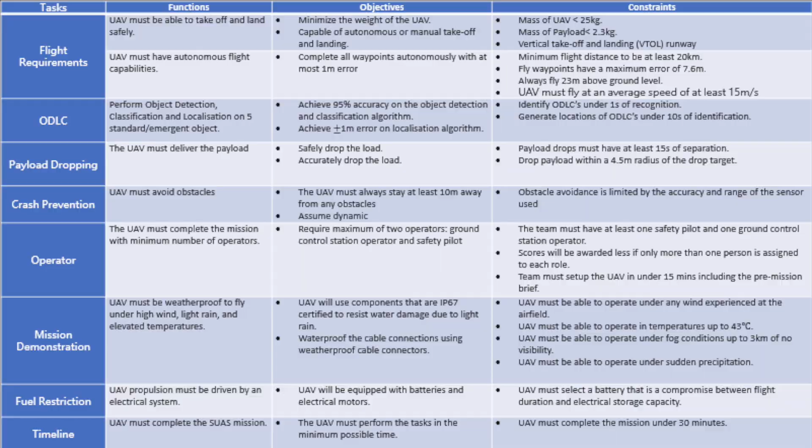Welcome to the technical design section. This section will give technical details on 10 aspects of our design. For our acceptance criteria, we devised a functions, objectives and constraints table to be used as a guideline to meet the competition requirements. For example, we constrained ourselves to be able to fly at a minimum speed of 15 meters per second, which would allow us to complete the mission within a maximum limit of 30 minutes.

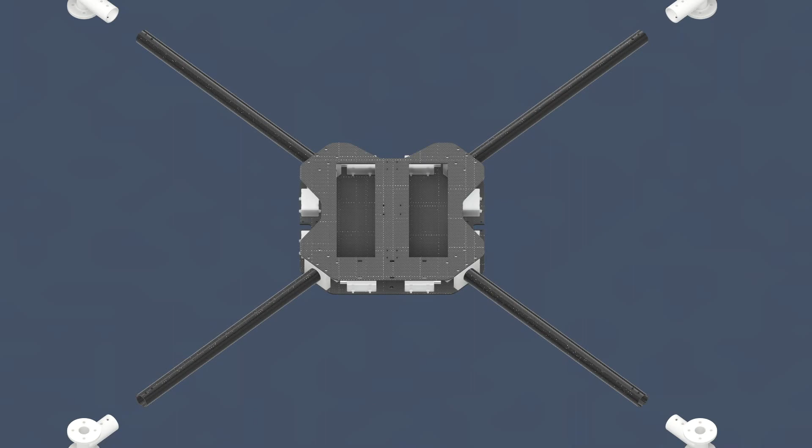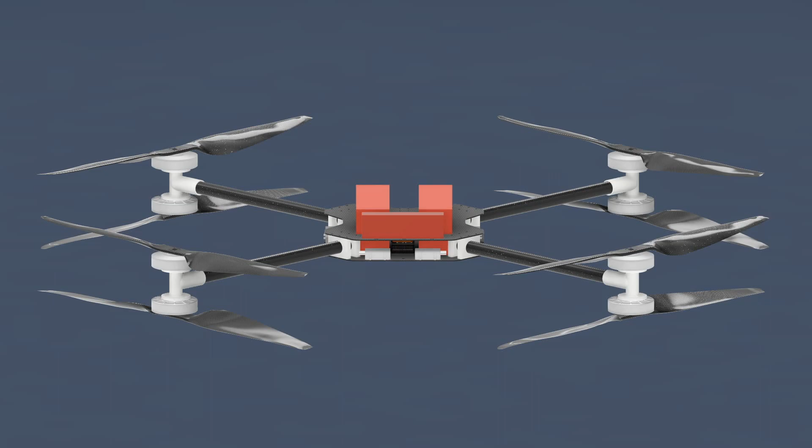A breakdown of our UAV design is shown here. The center of the body houses the Cube Orange and Herelink, which are used to control both manual and autonomous flight. 8 ESCs are housed on the same plate, which transmit power to each of our 8 motors. Our X8 coaxial design uses two 27 amp-hour batteries to power the motors, which are housed on custom-built arms. A smaller 6.5 amp-hour battery is used to power the auxiliary electronics, such as our LiDAR and GPS.

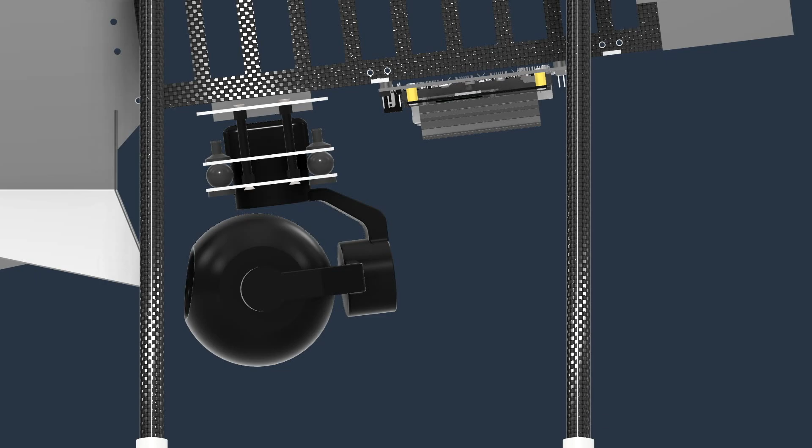On the underside of the drone, we've mounted our payload delivery system, which uses a winch to safely and accurately lower bottles to the target. Underneath this, we've mounted a Jetson computer and variable zoom camera, which are required for object detection, classification, and localization.

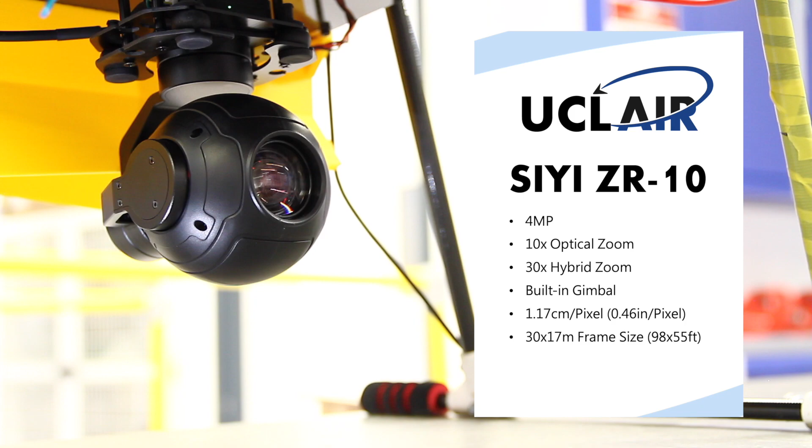The camera of choice is the SIYI ZR10 gimbal camera, a 4 megapixel gimbal camera capable of 10 times optical zoom or 30 times hybrid zoom. The inbuilt gimbal ensures the camera will always look down, regardless of the drone's orientation. The ground sampling distance of the camera from a height of 23 meters was 1.17 centimeters per pixel, with each frame covering 30 meters by 17 meters on the ground.

The localization of the airdrop targets was calculated by using a single camera and a GPS module. The longitude and latitude of the targets were determined by calculating the target's location in pixels from the center of the image, and then by using the focal length of our camera, we were able to convert that distance into meters and then into GPS coordinates.

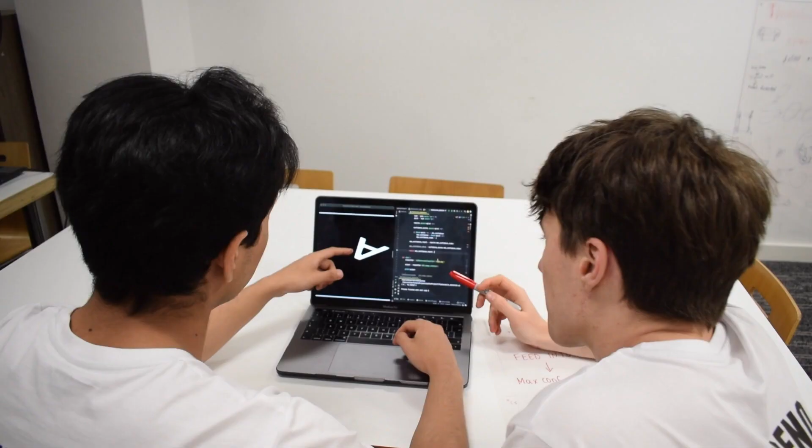The main algorithm used for color detection is k-means clustering. The largest contour is extracted and pasted onto a pink background. This was done as pink is not a color listed in the regulations and is therefore ignored during the k-means clustering, to ensure the background has no influence on the result. The algorithm maps each RGB code of the cluster center to a color dictionary and outputs 2 colors, for the shape and for the alphanumeric.

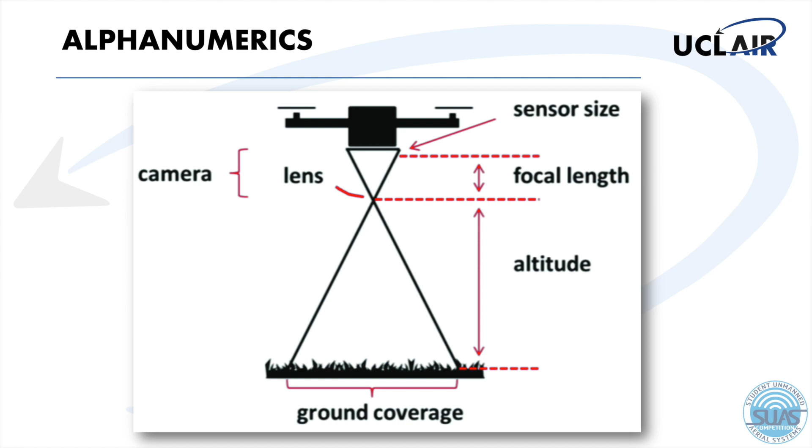The shape of the targets are classified using YOLO v8, trained on a synthetic dataset of 10,000 images over 50 epochs and using a batch size of 5. The size of the shapes in the dataset were approximated by using the focal length of the camera. The symbols recognized are then rotated 15 degrees each time before being fed into OCR Tesseract for alphanumeric classification.

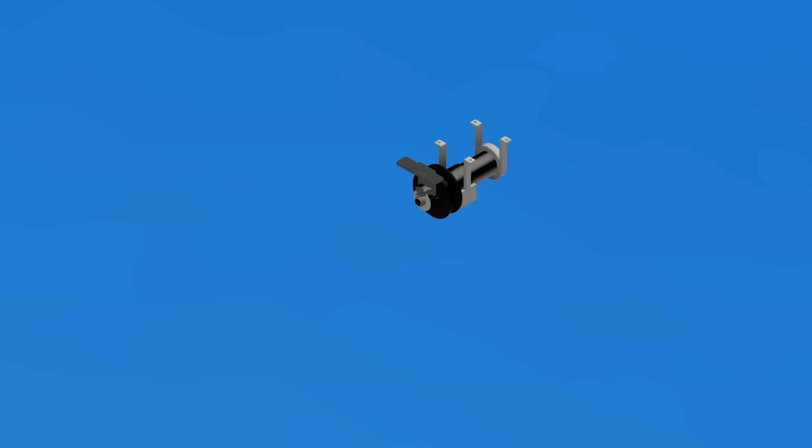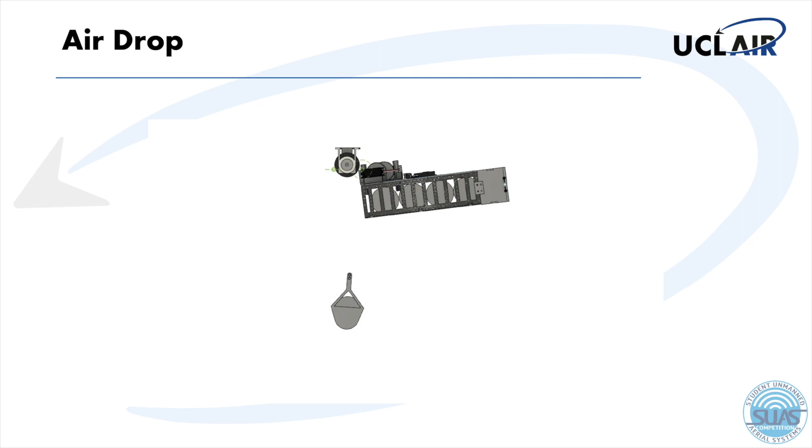For the airdrop task, our team has built a proprietary airdrop mechanism. This uses a DC motor winch that controls a bottle carrier containing 1 bottle. The remaining 4 bottles are stored on an inclined water bottle storage rack controlled by 2 servo doors. When the aircraft reaches the drop location, the bottle carrier is lowered to the ground by the winch via a fishing line and topples once it hits the ground, causing the water bottle to be deposited on the target.

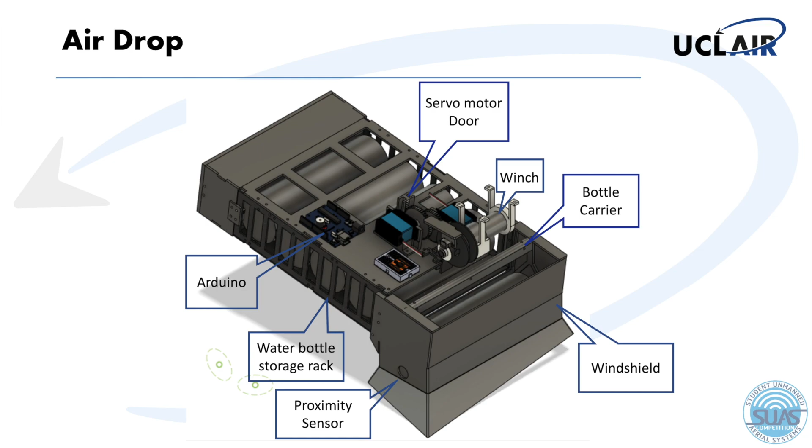The winch will then bring the carrier back up to its initial position, and the servo doors will actuate to allow 1 more water bottle to be loaded into the carrier. The process is then repeated at the next airdrop coordinate. The system is controlled by an Arduino Uno, and an encoder is installed to monitor the drop progress and control the time taken for each drop. In addition, a capacitive proximity sensor is used for redundancy to ensure that the carrier is in the correct location before the next bottle is released.

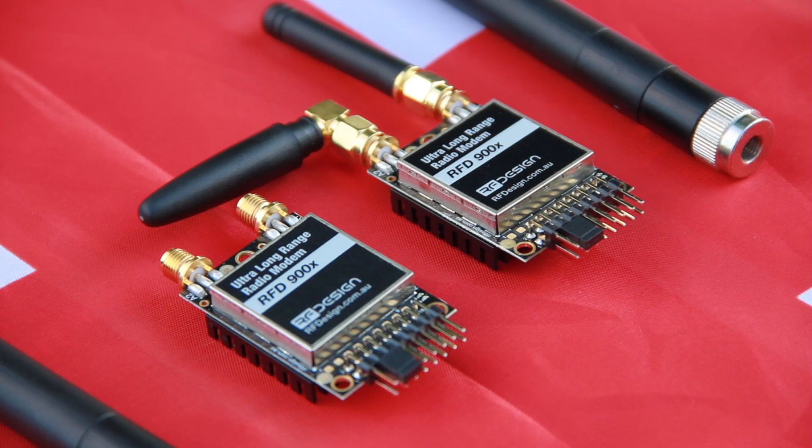For air-ground communications, two telemetry and radio units are utilized. The first of these equipment are the RFD900 radios. RFD900s are high-performance 900 MHz radio modems that facilitate communication between the UAV and the ground control station from distances of up to 40 kilometers. Data transfer is achieved using Mavlink, a lightweight messaging protocol. The throughput of this protocol is well below the 500 kilobit per second air data rate of the radio. Additionally, the radio modems are capable of frequency hopping and signal encryption to ensure reliability and safety. The second communication unit uses the Herelink ecosystem, consisting of an air unit and a controller.

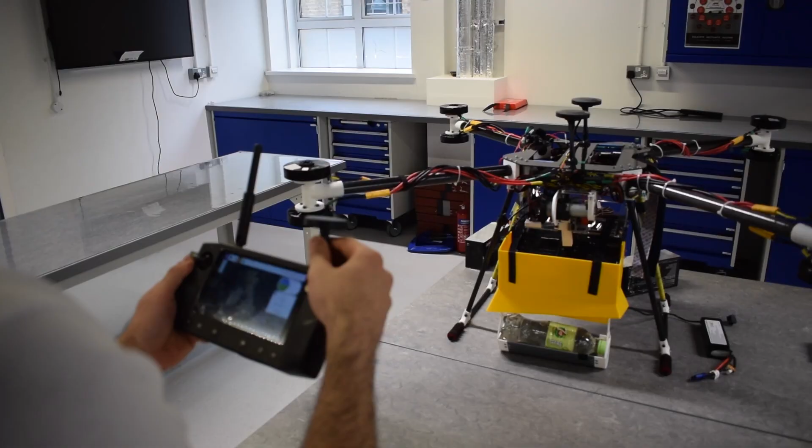The Herelink air unit has an RC receiver to allow manual flight using the controller. At the same time, the air unit communicates with the controller using Mavlink. Hence, the controller can act as a secondary ground control station. Herelink uses a 2.4 GHz frequency band and has a range of up to 20 kilometers. The combination of these two telemetry systems allows for reliable communication even if one of the systems fail.

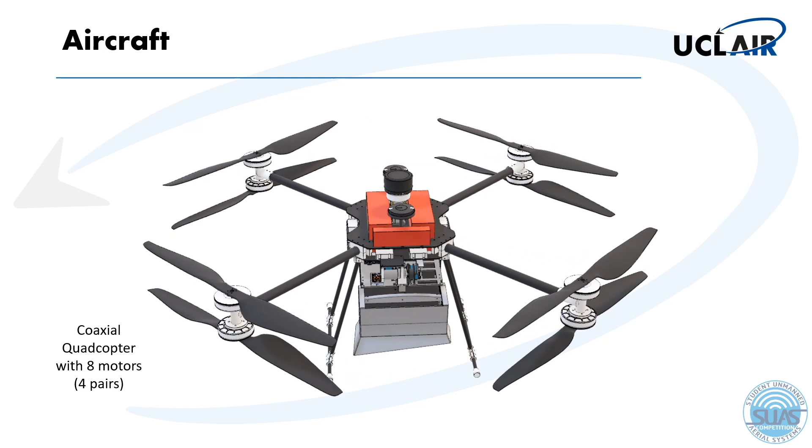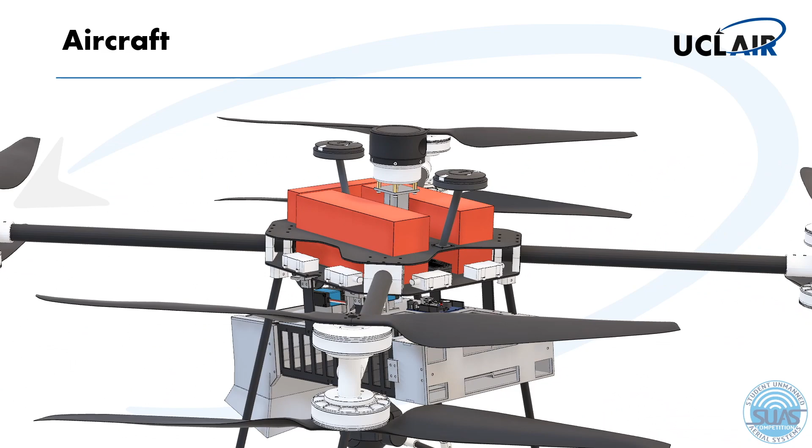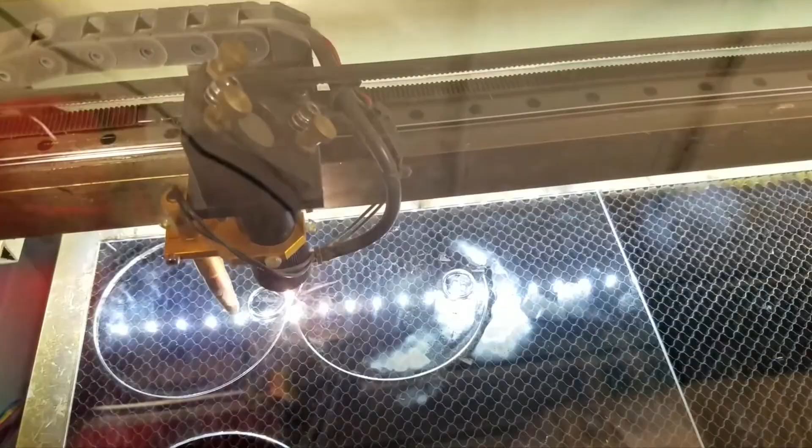The team would make a coaxial quadcopter which is driven by 8 motors, each providing a thrust of 6.7 kilos. These are powered by 2 lithium-ion batteries which give the UAV a flight time of 27 minutes at full speed. The chassis was designed around these components with compactness in mind to minimize aerodynamic resistance. The chassis was manufactured through 3 main processes: CNC milling, laser cutting, and 3D printing. These methods were chosen as they would reduce manufacturing lead times, allowing more time for testing and implementing design developments.

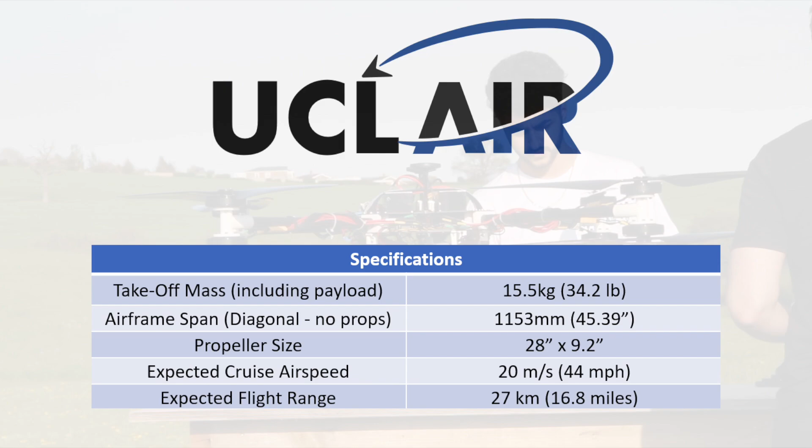The final airframe has a span of 1.15 meters, a takeoff mass of 15.5 kilograms, and prop size of 28 inches. It also has an expected cruise speed of 44 miles per hour, giving it an expected range of almost

17 miles. To achieve autonomous flight mission in the competition successfully, our navigation system is handled by the Pixhawk Cube Orange, which runs the ArduPilot autopilot firmware. Through the use of MavROS, which is a Mavlink extendable communication node for ROS, the navigation system can be controlled by the onboard computer entirely.

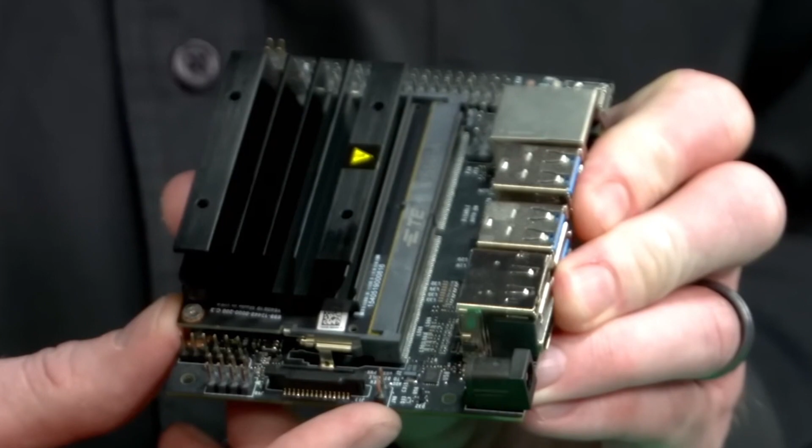Mission Planner is used as the ground control station to monitor the state of the autopilot and visualize the position of the UAV. Before the start of the mission, the predefined waypoint in the paper format is detected and uploaded to the waypoint database using alphanumeric algorithms.

Once this process is completed, the UAV awaits for an arming and mode change command, after which it will initiate the entire mission automatically, which includes navigating the competition waypoints, beginning the obstacle avoidance algorithm if obstacles are detected, and also executing the coverage and airdrop sequence in the drop zone area.

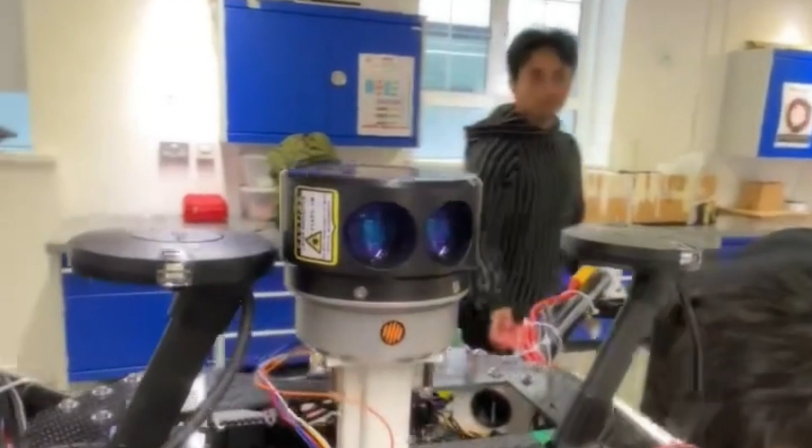For obstacle avoidance, a 2D LiDAR with a 360-degree horizontal FOV is used. Point cloud data of any objects within 100 meters range are collected and then segmented to identify the number of obstacles and their distances to our UAV.

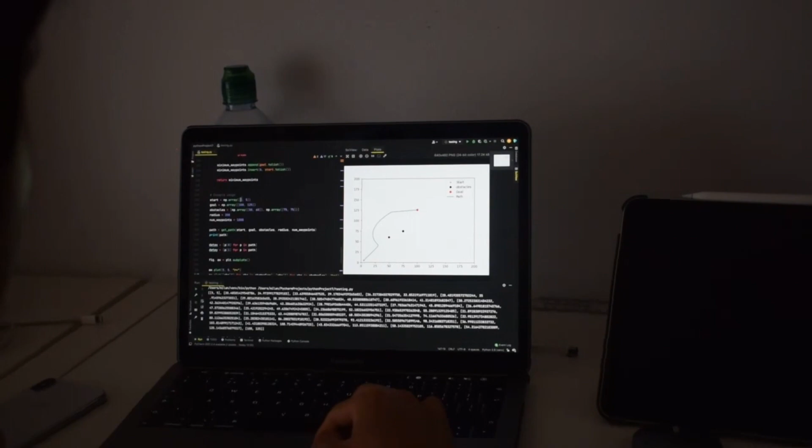Next, since the obstacles will be dynamic, we are introducing a novel concept to predict the future trajectories of the obstacles using Kalman filter. The present and the future predicted locations of the obstacles are then fed into the path planning algorithm, which is the artificial potential field algorithm. Our system updates the flight plan by generating local waypoints that the UAV can follow so that it can fly to its next global waypoints without coming into contact with the current and future positions of the obstacles.

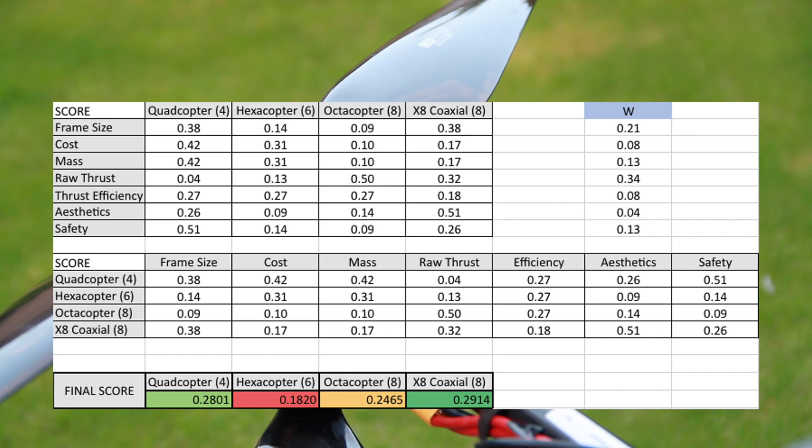There were many instances where we considered several alternatives. For instance, we used a quantitative approach to determine what airframe configuration was best suited for the competition, whether that was a quadcopter, hexacopter, octacopter, etc. Also, for the airdrop mechanism, we considered using a parachute, a winch with electromagnet release, or even a bungee jump concept. Again, after a quantitative approach, we decided to use the following design.

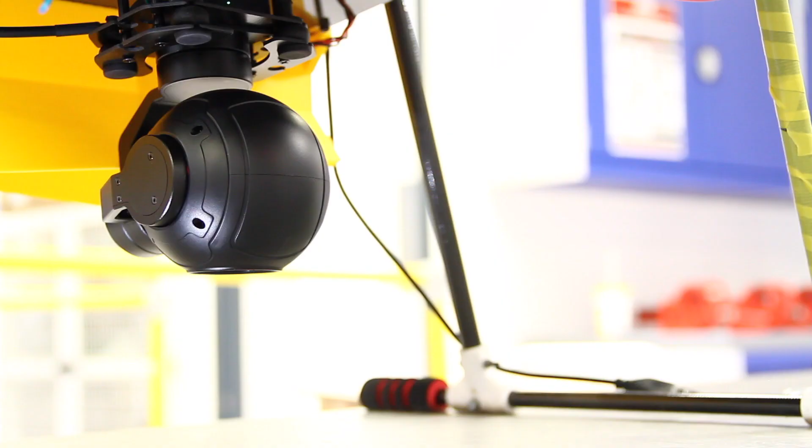Lastly, we researched several camera and gimbal possibilities. We tested the GoPro 11 with a Tarot gimbal. However, we concluded that the ZR10 would be the perfect combination of lightweight, resolution, and connectivity.

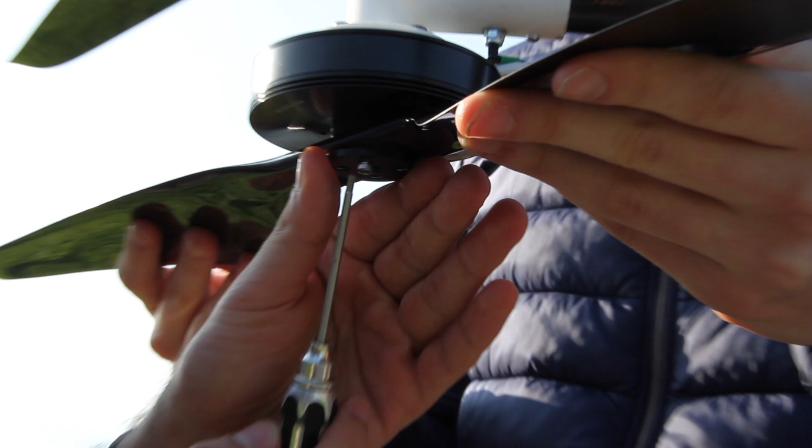One of the biggest risks is mechanical failure, so we're taking extra precautions like double checking nylock, Loctite, and fasteners with experienced technicians before every takeoff.

Another risk is a loss of communication with the drone. To mitigate this, we're using a backup redundancy communication channel.

Software in the loop with Gazebo software was also used to test navigation and object detection and classification code before deployment in the UAV. This reduced the risk of faulty code.

Lastly, proper documentation of UAV regulations, both in the UK and the US, were completed before maiden flight.

Now we'll move on to the flight readiness review. This section will provide key metrics on 7 different areas of our aircraft's performance.

The performance of the imaging algorithms have been improving throughout each iteration. After 52 airdrop tests, the mean error of the localization of the target was 3.5 feet. The accuracy of the shape classification was 92%. The accuracy of the character classification was 82%, and the color accuracy was 93%.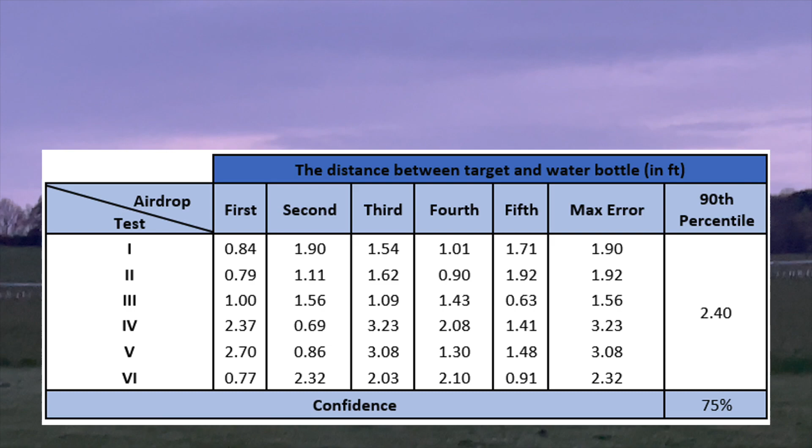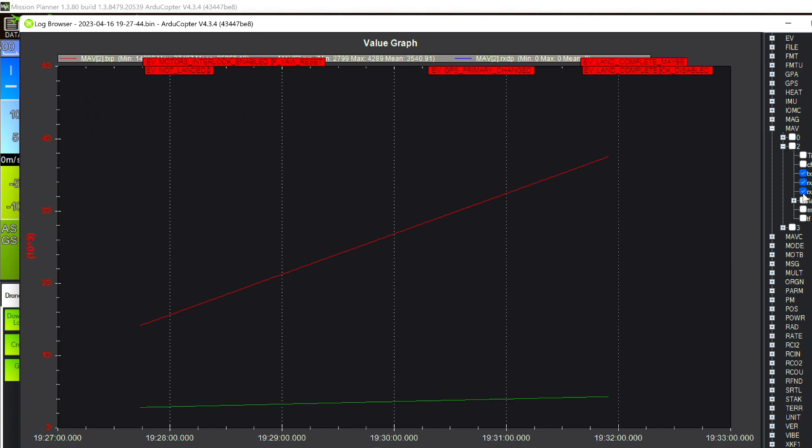To test the performance of our telemetry equipment, we designed a mission to fly the UAV 1.5 miles away from the ground control station and the RC controller. The mission log files demonstrated that during the mission, around 23,000 packets were received by each of the ground control station and the controller, while 1,500 packets were transmitted back to the drone. During the entirety of the mission's 4 minutes, there were 0 failed packets. This indicates the robustness of our communication system.

To test the aircraft's performance, 30 flight tests were conducted. These were a combination of both manual and autonomous flights and totaled 4.8 hours of total flight. We also conducted 5 additional tests in which the UAV took off and landed immediately, to ensure that the UAV would be able to withstand the loads experienced during these extreme phases. Through testing, the average flight range was found to be 14.2 miles and the top speed was 45 miles an hour.

We were also able to ensure that the UAV met all other flight performance requirements. Our UAV conducted 25 autonomous flights in which it attempted 249 waypoints. With a 100% success rate, it reached 249 waypoints with an average waypoint miss error of 1.48 feet and a maximum waypoint miss error of 2.62 feet. This demonstrates that our UAV can reliably navigate through waypoints within the competition requirement of 25 feet.

In terms of obstacle avoidance, we tested its performance by flying our UAV autonomously during its waypoint navigation with other UAVs in the same airfield controlled manually. For static obstacles, we can reliably avoid 20 out of 20. For dynamic obstacles, we performed 10 tests, each consisting of 1 dynamic obstacle. We successfully avoided 6 obstacles without any human intervention or manual override.

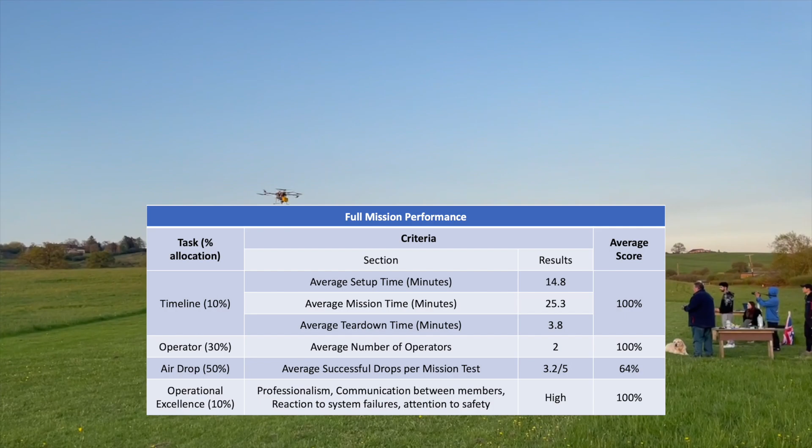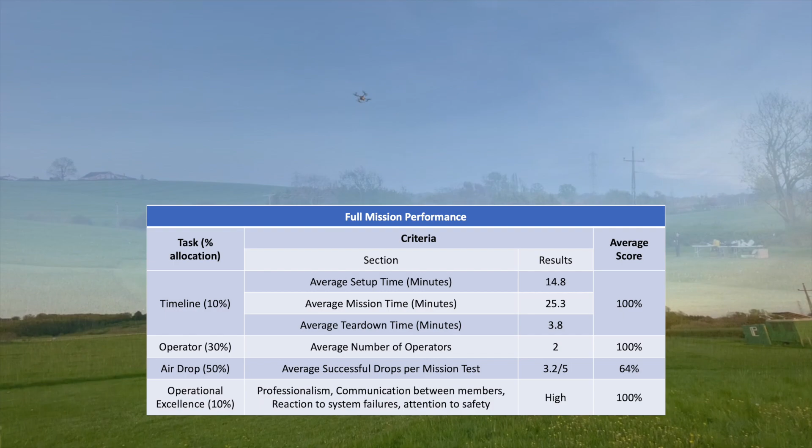UCL AIR has conducted 5 full mission tests to validate the performance of each subsystem when integrated together. For the timeline section, we can comfortably execute the setup, mission, and teardown within the time restriction, hence we have scored an average of 100%. For operator, our UAV platform was designed from the beginning with the intention to achieve high autonomy. Hence in the mission test, we only require 1 GCS operator and 1 safety pilot. We successfully delivered an average of 3.2 bottles according to the competition requirement across all 5 full mission tests. This gives us an average score of 64%.

Throughout all full mission tests, the team was put under competition settings to mimic the pressure that would exert on us in real life. We have resolved certain problems with high professionalism and succinct communication that has ensured the full mission test to be carried out in a safe manner. We therefore have evaluated our operational excellence score to be 100%. The average full mission test score for all 5 tests was 82%. With more practice and familiarity, we predict an upward trend of our full mission score with high confidence.

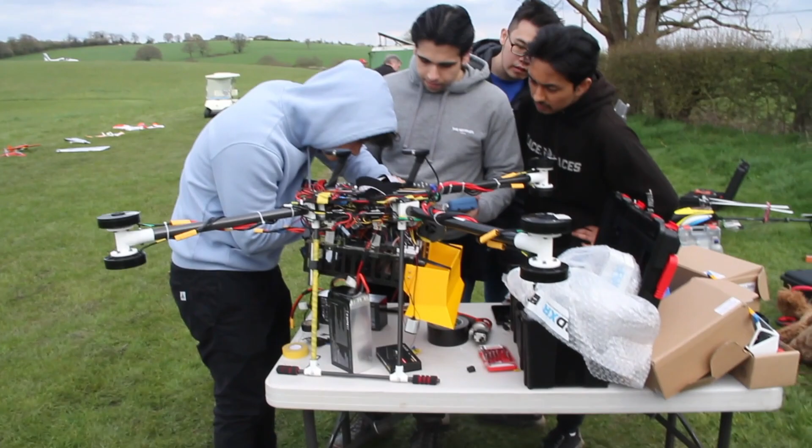With just 7 passionate and determined students, 6 months of tireless work, and a tight budget, UCL AIR has created a drone that boasts advanced flight capabilities, intelligent obstacle avoidance, robust imaging, and pinpoint accurate payload delivery. As a first-time competitor, we're bursting with pride to showcase our technology at this prestigious competition. Get ready to watch UCL AIR soar to new heights on the global stage.

Welcome to the appendix of our video, which includes the mandatory proof of safe flight section.

The first clip is of a manual flight, where the drone gets 1,000 feet away from the safety pilot. The pilot performs a manual takeoff and then heads the aircraft out into the field. At this point, the aircraft has reached a distance of more than 1,000 feet away. Now it's time to turn the drone around and bring it back. The safety pilot carefully navigates the aircraft back to its starting location. The landing process then commences with the aircraft's altitude decreasing. The safety pilot then maneuvers the aircraft just slightly closer before finally landing. And that's it. The aircraft is now gently and safely landed.